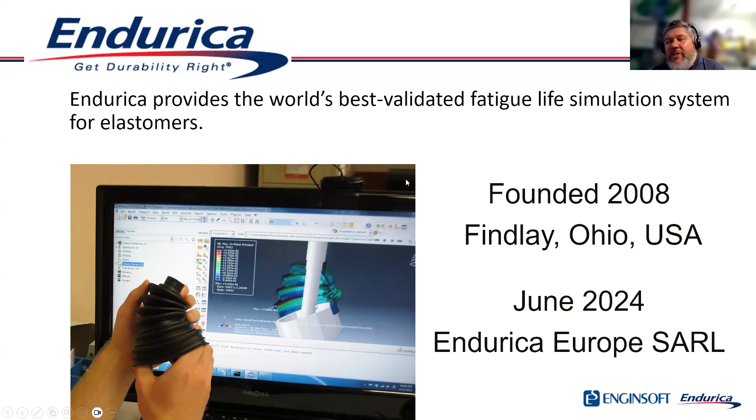So let's dive right in. Just a few words about Endurica. I'm the founder of the company. This is year number 17 for us; I started up in 2008. We did open an office in Luxembourg last year, so that's kind of new for us. Throughout the entire history of the company, we've really been focused on elastomers, simulation, and durability.

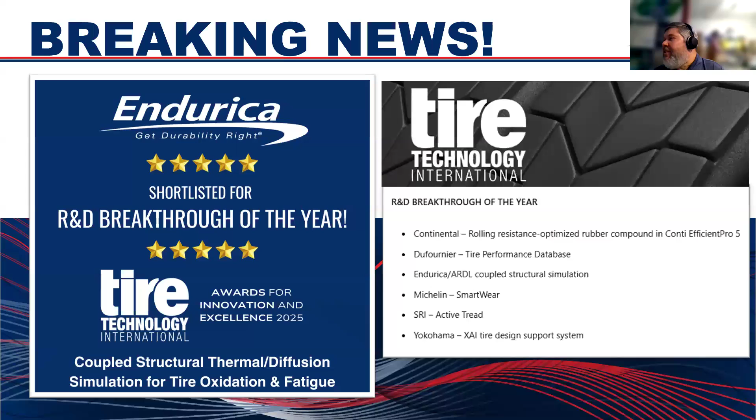I just want to brag a little bit, forgive me, but we just got word that at Tire Technology International, a conference in Germany in a couple weeks, we've been shortlisted for one of their awards. They haven't announced yet who's going to win, but we've been listed for R&D Breakthrough of the Year for a new capability we're going to be launching later this year, for modeling oxidation in elastomers with a coupled structural thermal oxidative simulation. So if you're a tire person, check that out.

To define things a little bit: in the infinite life workflow, what we're saying is that just like metals, rubbers also have a fatigue limit. If you stay below the fatigue limit, cracks will not grow in fatigue. So a simple way to design for long life is just to keep your loads below the fatigue limit. That's what we call infinite life design.

So when you do infinite life design, rather than trying to predict the life, all we do is measure the fatigue threshold, and then check to see how much margin we have between our worst case load and the fatigue limit. It's a very simple analysis, sort of a go/no-go—you either have it or you don't, infinite life.

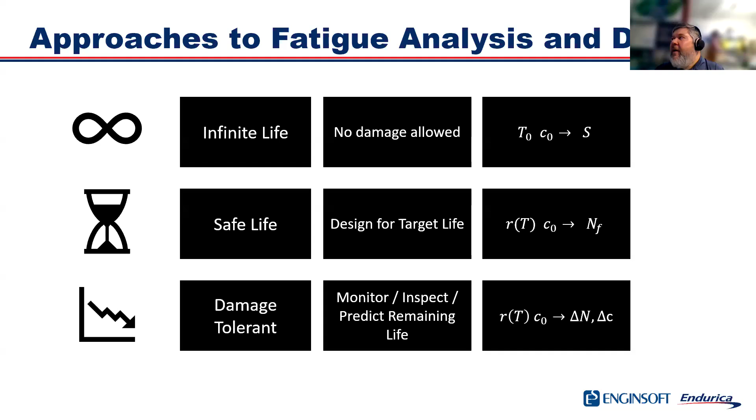So anyhow, three levels of analysis. In today's webinar, we're really just going to focus only on the first category, the infinite life design category. We'll talk about safe life and damage tolerant another day, but today we're just going to focus on the infinite life analysis.

So here's kind of an agenda for today's discussion. First of all, I want to just introduce a few principles that we can use to understand and organize how we do characterization and analysis.

So then after talking about the theory, I want to talk about how we do the materials characterization - how do you measure a fatigue threshold? And once we do that, I want to talk about how you can use these principles in materials development. People who make rubber parts a lot of times have a lot of choices about what materials and what sourcing they have for their materials. So we'll talk about how you can use these principles to select the right material for your application.

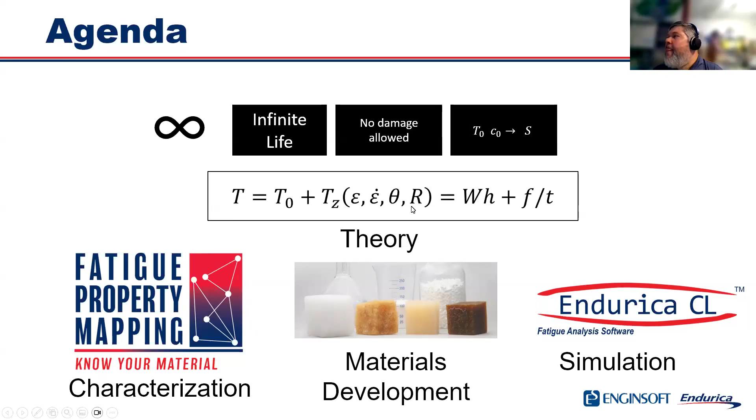And then finally, we'll talk about the simulation side - how do you use these ideas in the simulation workflow to get your design right? All right, so let's start with a few basics.

When you're talking about durability in a rubber part, there's really 3 ingredients that we need to think about. First of all, we have to think about crack precursors. If you get a microscope and look closely enough at your material, you're going to find that every rubber, even before it's ever experienced any load, always has some kind of microscopic feature that under load can grow as a crack.

This could be undispersed carbon black or contamination of some kind, microscopic, 10, 20, 50 microns in size. But that's one thing that's there. So from day one, you've got these crack starters, crack precursors in the material, and then the next thing we have to think about is crack drivers. So you've got these small features, they concentrate stress, and then under the loads that you apply to your part, those small cracks begin to grow.

And so we need to quantify the crack drivers. They're related to the stress strain behavior. We use a parameter called the tearing energy or the energy release rate - for those who may be familiar with fracture mechanics, it's kind of an idea from that field. But obviously, bigger tearing energies lead to faster crack growth, smaller tearing energies lead to slower crack growth. And so we need to quantify what's the magnitude of the crack driving force.

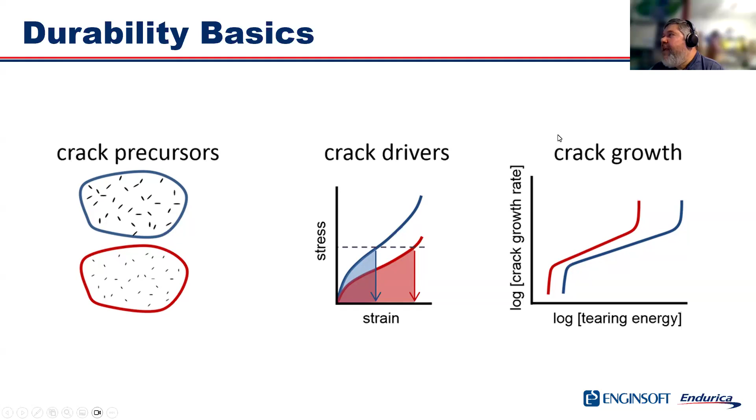At lower tearing energies, you'll get fatigue crack growth. And then if the tearing energy is sufficiently small, then that's what we're talking about when we say a fatigue threshold - what's the minimum energy that it takes to grow a crack. So these are kind of the basic ingredients for any fatigue analysis.

Here's an example of rubber's fatigue crack growth rate curve, and there's two or three features on here I want to point out. If the energy input to the crack is sufficiently large, T sub C, that's the critical tearing energy, then at that point the crack is just going to grow spontaneously.

So that would be a strength problem. As you back off on the energy, you're going to find that the crack growth rate slows down, and it's going to do that according to a power law that has a power law slope of F. You can see this if we're plotting on log scales, that's going to make a straight line relationship in the mid-range, and then if I back off sufficiently, the parameter T naught, this is my fatigue threshold.

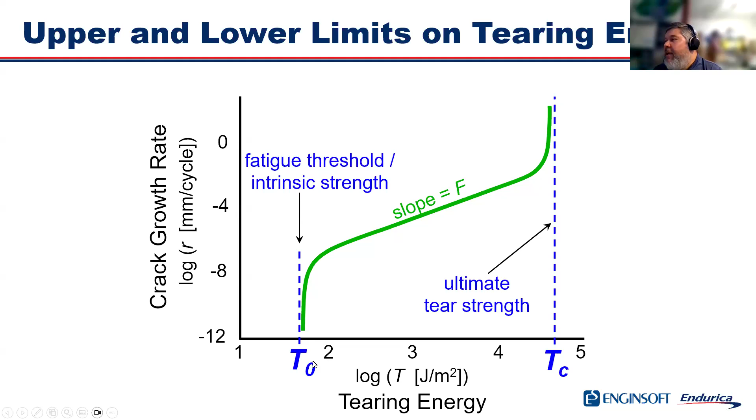Sometimes we also call this the intrinsic strength of the rubber, and you'll see why in a minute. But that's really the parameter. When we talk about doing infinite life analysis or safety factor analysis, this is the parameter that we're really interested in, is the T naught parameter.

So let's talk about the requirement. If you've got a sheet of rubber and it's got a crack, and if you imagine that crack is growing at some steady speed, you can ask the question: how much energy does it take to propagate the crack at some particular speed?

What we know is that if you want to grow a crack, then what that means is that every polymer chain—right, rubber is a polymer, long chain molecules—but in order for a crack to grow, every single polymer chain that crosses the plane of the crack must break. And in order to break each individual chain, there is a required amount of energy.

It's the bond breaking energy for these carbon-carbon bonds in the main polymer chain. So it's the energy to break a chain, and then it's also how many chains per unit cross section area. And the product of those two things gives you the tearing energy.

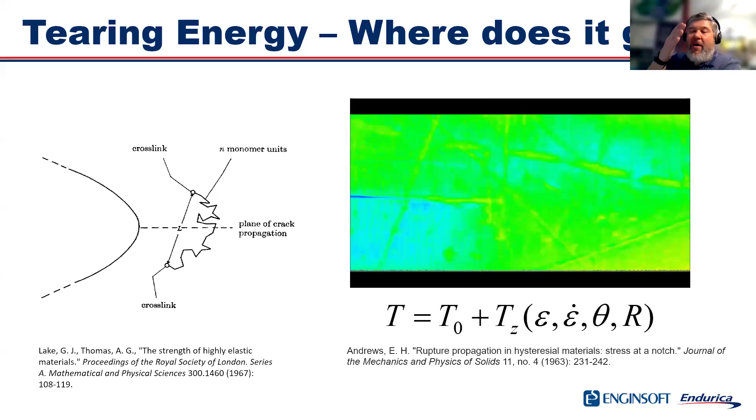T naught for a typical rubber might be of the order of maybe 50 joules per meter squared—it's actually quite a small number, not that much. Depending on how fast the crack is growing, TZ can be bigger or smaller. If you're propagating the crack at a very high rate, TZ might be as high as 100,000 joules per meter squared, and as you back off, that can be quite a bit smaller too.

So as a crack approaches a polymer chain, the polymer chain stretches out. In the measurements I'm going to show you, we're going to use an experimental method that uses cutting with a blade to measure the intrinsic strength. That's kind of what you're seeing in this image here: we have a blade penetrating into the rubber, and we load up the polymer chain and break it—that's how we measure the intrinsic strength. So T naught is the intrinsic strength, and that's what we need to measure. Of course, if you're operating at energy below T naught, there is no crack growth.

You'll hear people use different words: intrinsic strength, fatigue limit, fatigue threshold, threshold tear strength. Those all mean the same thing.

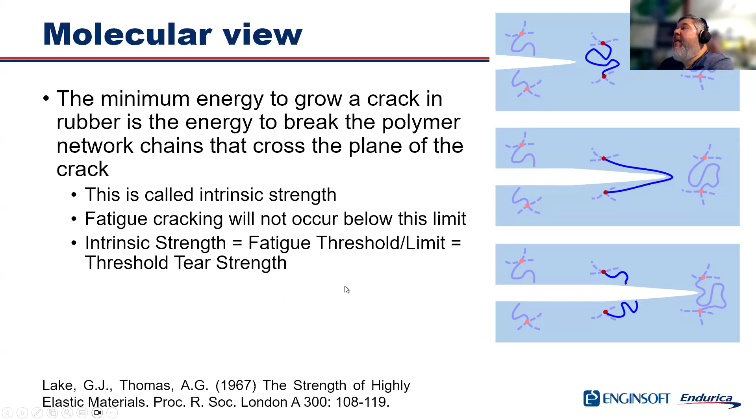Now, how do you measure this? There's a couple different methods you can use. The method we use was originally proposed by Graham Lake and O. H. Yeoh, who at the time were working at the MRPRA in the UK. They proposed a method that uses a very sharp blade.

You use a planar tension test piece. You stretch the rubber - the blue arrows are showing the rubber stretching in the horizontal direction. Once the rubber is stretched, you cut it with a blade. This blade is instrumented with a load cell attached to it, so we can measure the energy input to the tip. The blade is meant to be as sharp as you can get it. Here's a microscope image of the blade.

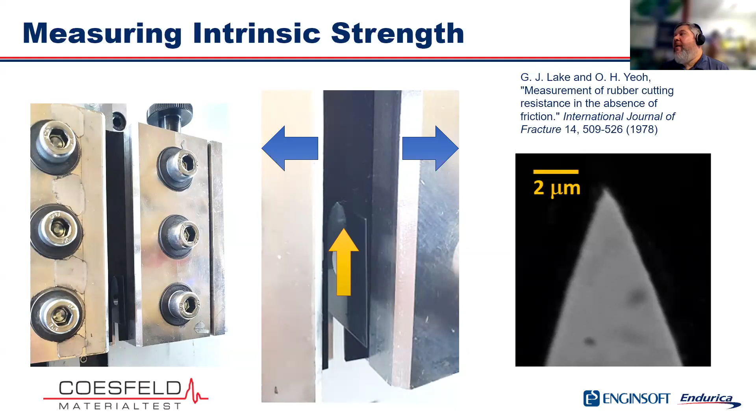This is how the measurement works. To talk more about it - I showed before how the tearing energy, when the crack is growing at a certain rate, is the sum of two parts. You've got the intrinsic strength that I want to know, and then you've got this TZ part that represents all of the dissipative processes. If the crack is growing quickly, that's going to be a very large number that'll completely bury T naught.

So in the experiment, what we want to do is find a way to get rid of TZ. The reason cutting with a blade works is that the order of the crack tip singularity when you have a blade is higher than if you don't, which means the crack tip process zone is greatly reduced when you have a blade. What you're looking at here is a finite element simulation showing the size of the process zone as a function of the amount of stretch on the rubber.

So in the experiment, we're going to stretch the rubber a little bit, cut it, stretch it a little more, cut it, stretch it, cut it. We're going to look for the place where the input energy is minimized. By doing that, we can make TZ as small as possible so that what's left is the T naught observation.

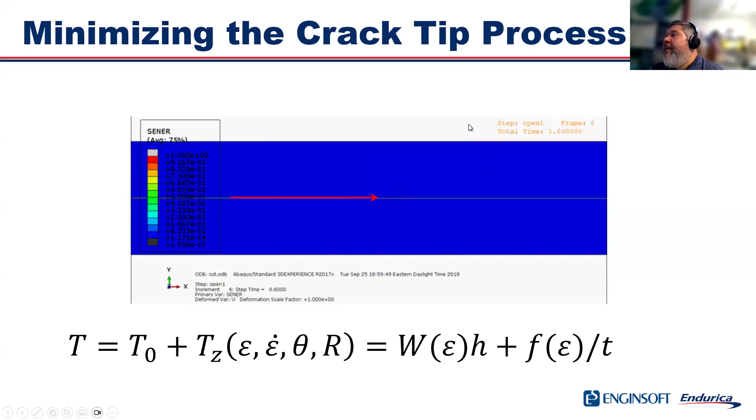And then when I put the blade on, if I know the force on the blade, that's little f, that contributes an additional energy - that's the second term. So the first term is the opening component of the energy, and the second term is the cutting component of the energy.

Now, the measurements I'm going to show you are made using a device called an intrinsic strength analyzer. This is a machine sold by a company in Germany, Coesfeld. We actually worked closely with Coesfeld to bring this instrument to market, so that people would have a way to measure this. It gives you results in about an hour or two that gives you T naught.

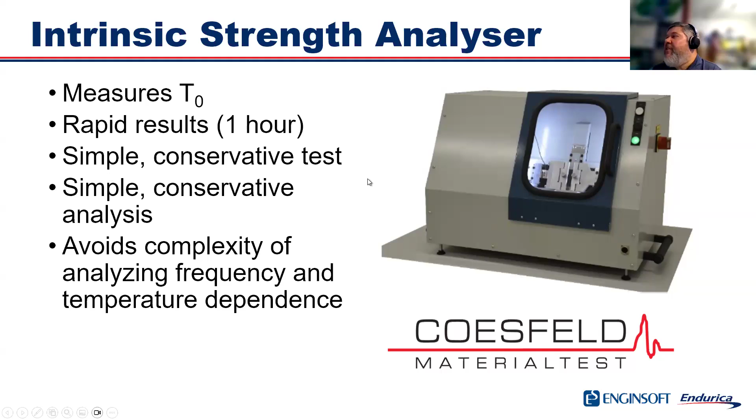It's a simple, conservative test. And like I said, it avoids the issue with the other method, where you'd have to do a fatigue test and reduce the crack growth rate sufficiently that you're approaching the threshold. The problem is that takes a long time. So this is a very fast and efficient test. Here's what it looks like to run the test.

In this case, there's 4 strain levels - you can customize that, but here we've got 4. Let's say maybe 3%, 5%, 7%, 9% strain. First we do a few cycles to precondition the specimen. After preconditioning, we go to the first strain and hold, then the second strain and hold, then the third, then the fourth. The hold period, if you look at this, is something like about 10 minutes per step.

Now, once we're holding at fixed strain, this third chart is showing the cutting force on the blade that's cutting the strip of rubber. What I want you to notice is that for each hold period, there's kind of two sub-steps. The first thing that happens once I hit my hold strain is that the machine stops and lets everything sit still for a couple of minutes, so any viscoelastic effects can die away. We call that the equilibration period. Everywhere you see a red rectangle, the machine is just sitting still, equilibrating. Once everything's in equilibrium, we begin to move the blade to cut the rubber.

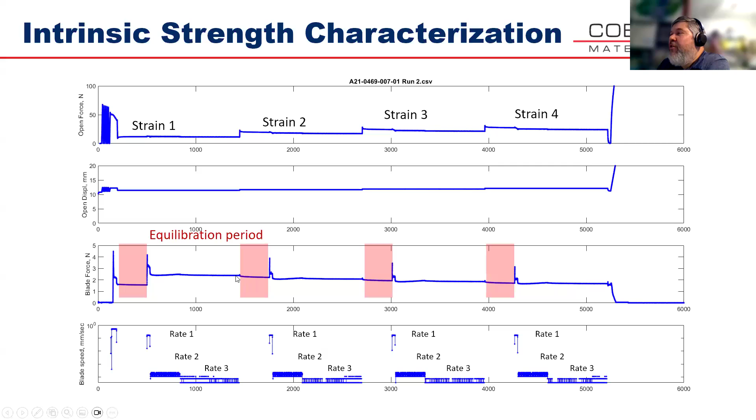So here's some examples of the curves that come out of this measurement. What we do is from each of these, we take the final steady state cutting force value at each strain level and at each rate, and we plot them in these charts. So what you're looking at here is a plot of the first term in the tearing energy equation versus the second term - this is the opening energy on the x-axis, and the cutting energy on the y-axis. You can see there's 3 curves here.

The top curve is for the fast cutting rate, this was at 10 millimeters per minute. The next 2 curves are for the slower cutting rates - factor of 100, factor of 1000 smaller. What's really beautiful here is that these 2 curves are almost on top of each other, which indicates to us that this is a good measurement, close to giving us the threshold.

So we plot these curves and fit a line that has slope -1. Notice how this red line crosses the x-axis at 1033 joules per meter squared, and crosses the y-axis at 1000 joules per meter squared. These curves are just kissing the red line. So the red line is what we would identify as the threshold cutting strength.

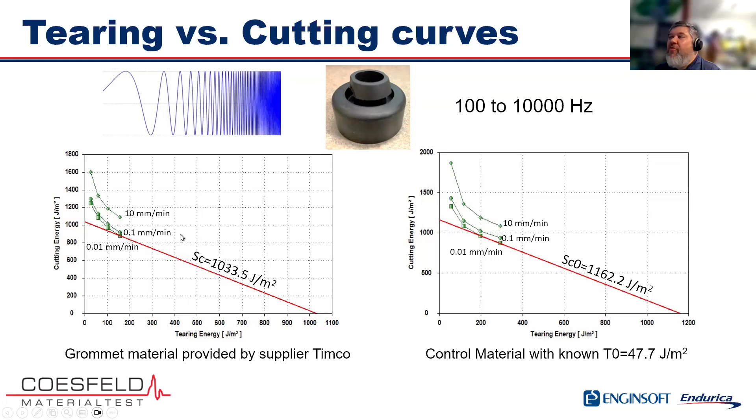And we measure the cutting energy as 1162. For the grommet material, we measure a cutting energy of 1033. And so the fatigue threshold that we would measure or report then would be basically 47.7 times the ratio of 1033 divided by 1162. That's going to give us the fatigue threshold for the grommet material.

And you can see here, this is a plot comparing the cutting energy that we measure with the blade to the inferred fatigue threshold. You'll notice they are different numbers. The reason for that is that the blade is not infinitely sharp, right? There's a finite radius of curvature at the blade tip, and so the difference between these reflects the sharpness of the blade. And so when we run this experiment, we run the control material so we can calibrate for the sharpness of the blade.

This was an experimental validation that Lake and Yeoh published for 6 different rubber compounds. And this was the paper where they showed that if you measure this cutting energy, it's very nicely correlated to the fatigue threshold that you would measure using very, very long crack growth tests.

For our study, we end up with a fatigue threshold of about 42 joule per meter squared for the grommet compound. And this is my plot of what we measure for cutting energy versus what the fatigue threshold is.

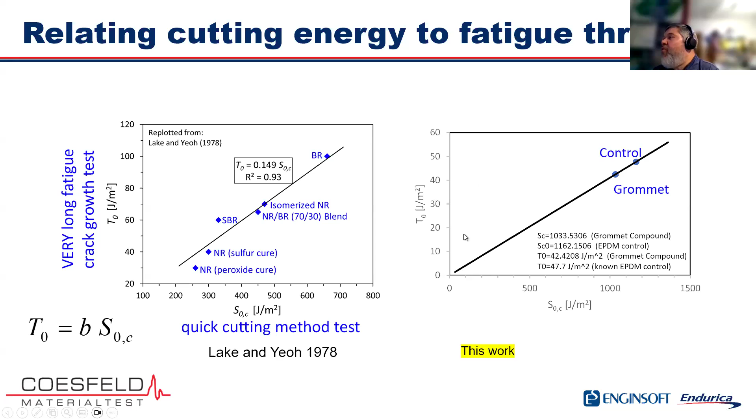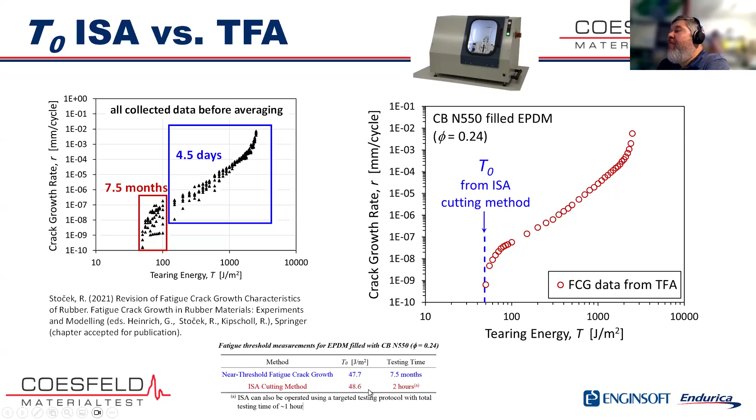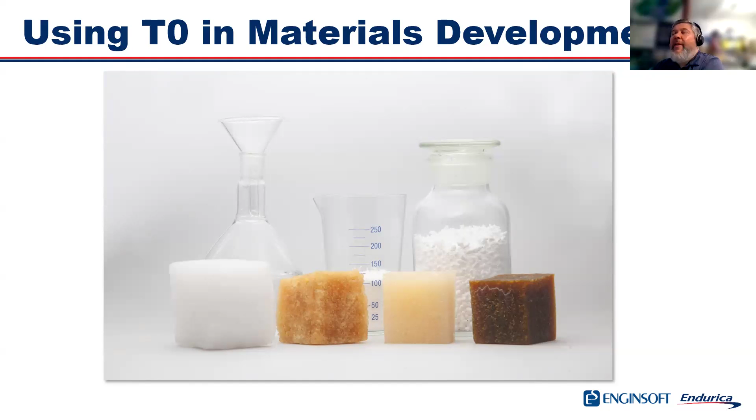All right, so that's kind of a little bit about the theory and the test method. Let's talk about how we can use this information in materials development applications. So a lot of times in materials development, the question that you're faced with is which material is the one that's right for my application. And so it's kind of A versus B, and how do you rank things and so forth.

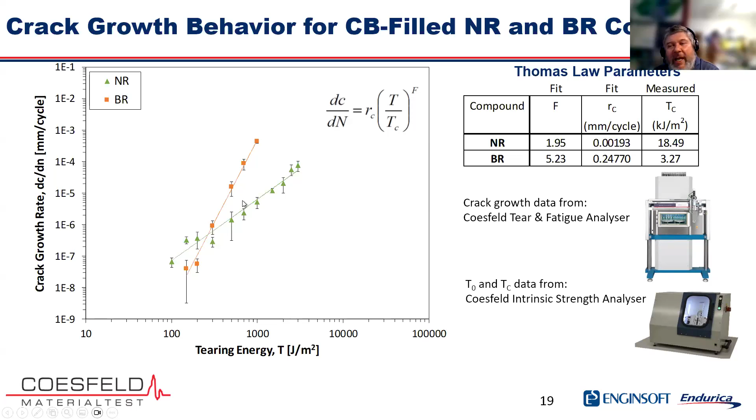One thing I want to point out is that T naught and TC, you can think of them as upper and lower bounds on these fatigue crack growth rate curves. As you change materials, the value of TC might change, and the intermediate behavior is going to change similarly. We can use that principle to make rapid estimates of the crack growth rate behavior.

So what I'm doing here is overlaying in this slide the results of the 20-hour crack growth test. The triangle data points here and the square data points here, that's the 20-hour crack growth test, and you can see you get a certain power law slope.

What I'm going to do is take the measured T naught and TC values for these two materials. For T naught, I'm going to plot those at a crack growth rate of 10 to the minus 8 millimeters per cycle. You can see here T naught for the natural rubber is about 50 joules per meter squared, and for the BR it's about 100 joules per meter squared. Then if I plot the TC value at a crack growth rate of 0.01 millimeter per cycle, you get this reversal in ranking.

And if you just draw a line connecting these two points, you can see that it actually reasonably approximates the crack growth rate curve for these two materials. It's not exactly precise - the slope you get with this simpler method isn't exactly the same as what you get with the actual crack growth test, but it's in the ballpark. When you're sorting material selection options and you've got a lot of them, this can be a very efficient way to rank order your materials.

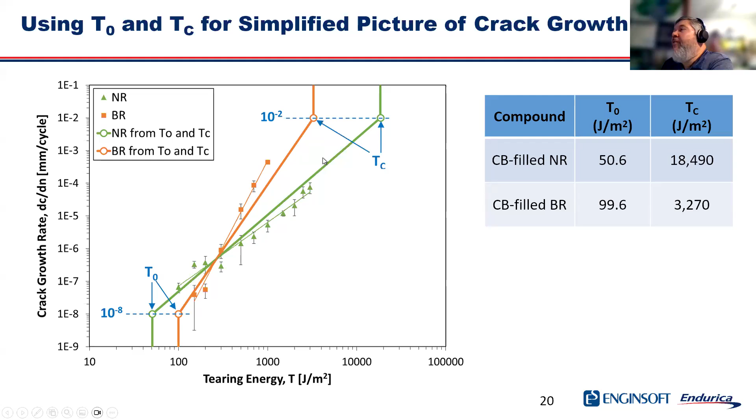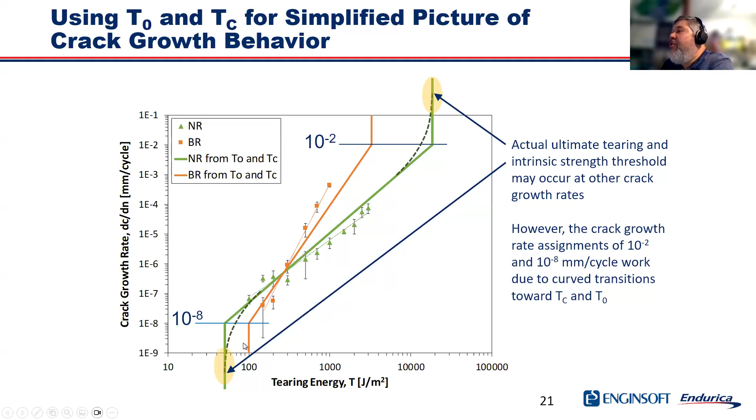So the key to this rule of thumb is just to remember that 10 to the minus 8, 10 to the minus 2, those are just kind of a rule of thumb guess here. In actuality, they might be different numbers, but for purposes of estimating in a materials selection context, you can use this. In fact, I call this the Robertson rule, for anybody who may know Chris Robertson - he originally noticed this trend in our data sets.

And here's an example of the calculation. If you give me TC and T naught, I can use this equation: F equals log of RC over R naught, which in this case is 10 to the minus 2 divided by 10 to the minus 8, divided by log of TC over T naught. That gives you an estimate of your power law slope.

You can see here for the NR, the actual experiment gives us 1.95, and our approximate method gives us 2.3. For the BR, we see 5.2, and for the approximate method we see about 3.9, or so about 4.0.

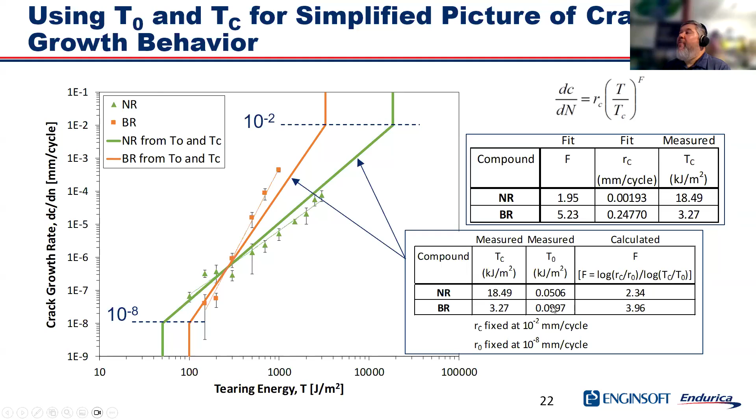We've actually tested this out on a large data set. We've gone back to a database of materials that we've measured, both T naught and the crack growth curve, and compared the actual slope values with the F values that we calculate using this simple method. It's not perfect, you can see there's a bit of scatter, but the correlation is something like R squared equals 0.8, which for purposes of doing materials development is probably good enough.

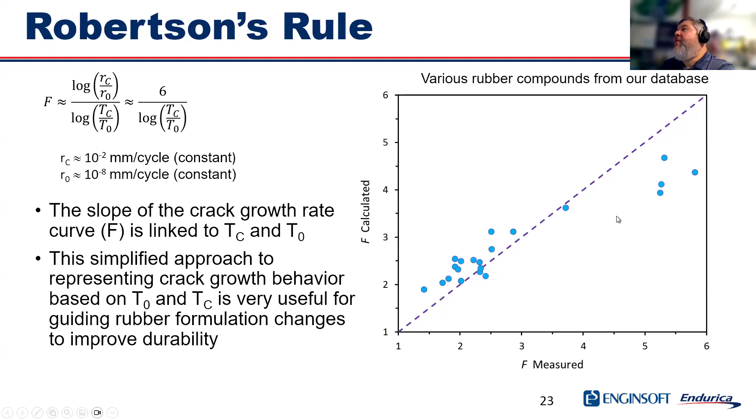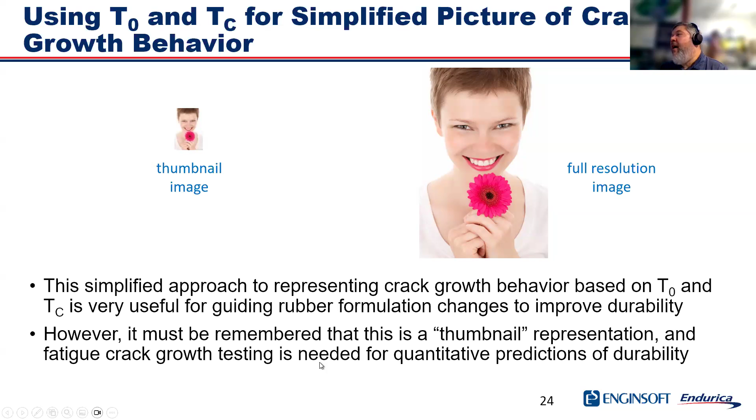Just to drive home the point, if you're going to use just T naught and TC without doing a crack growth test, it's a bit like using a thumbnail image. This is a very low resolution image. You wouldn't scale this up and present it to people as a pretty picture, but for getting an idea of what things look like, it's a very useful tool.

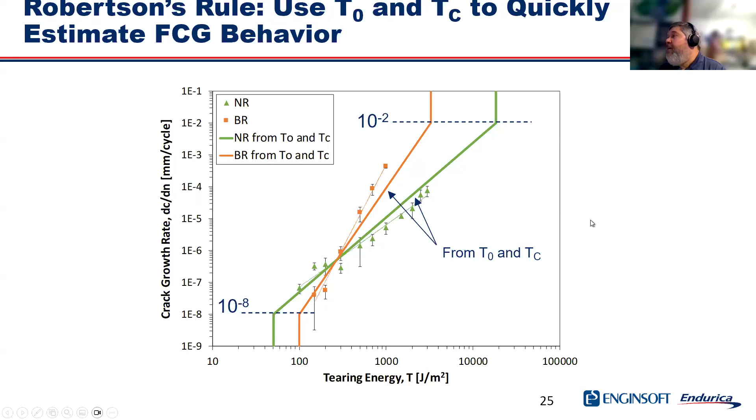So anyhow, that's Robertson's rule: if you measure T naught and TC, you can sort of fake in these crack growth curves, and you can do this to do a very rapid, low time, low cost sorting of your material options.

Okay, so last topic, let's talk about using the fatigue threshold T naught in a simulation. This is the workflow where we're going to calculate a safety factor. The safety factor is the ratio between your fatigue limit and your worst case load. Typically this might look like this: obviously you're going to measure your rubber stress strain response, you're going to do some kind of nonlinear analysis of your duty cycle.

You're going to have experimental measurements of your precursor size, and experimental measurement of your T naught value, using maybe the ISA, and those are all going to go into your analysis. The safety factor is an output that you can request from the Endurica CL fatigue solver. So you just put in your strain history, put in your material properties, and one thing you can get out is safety factor.

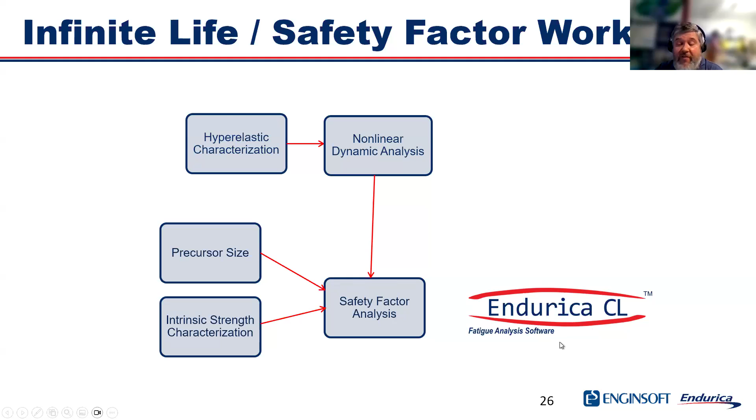When you use the safety factor analysis in Endurica, in cases where you have multi-axial loading, it's going to use a procedure called critical plane analysis. The purpose of critical plane analysis is to take account of the multi-axiality of loading.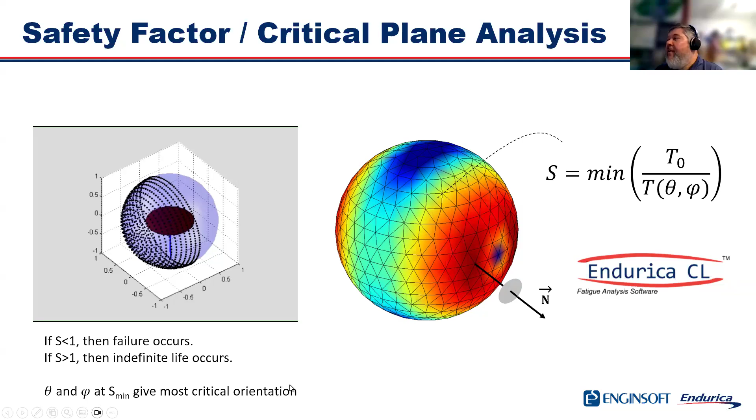What you're going to get then is, if you follow the unit vector to the surface of the sphere and then color each point, you'll get a colored ball where you see red, that's the place where the safety factor is the smallest. Where you see blue, that's where the safety factor is the biggest. What we report for each finite element is the value of the reddest point, or the smallest safety factor. So this not only gives you the safety factor, it also gives you the orientation of the plane for each element that is closest to being not infinite life.

So let's apply this to our grommet. Here are some material properties for the particular rubber that we've got. You can see I've got a shear stiffness of 3 megapascals, a precursor size of 100 microns, and a threshold of about 800 joules per meter squared. And I've got 3 load cases: a high, a medium, and a low load case that I want to model. Maybe I'm developing some specs for what the allowable loads are for this grommet.

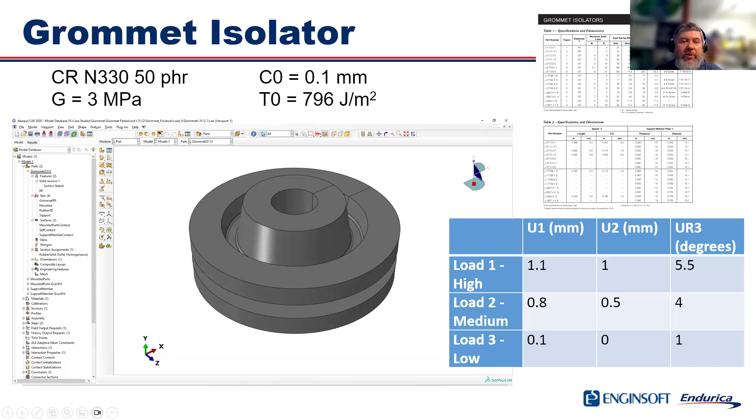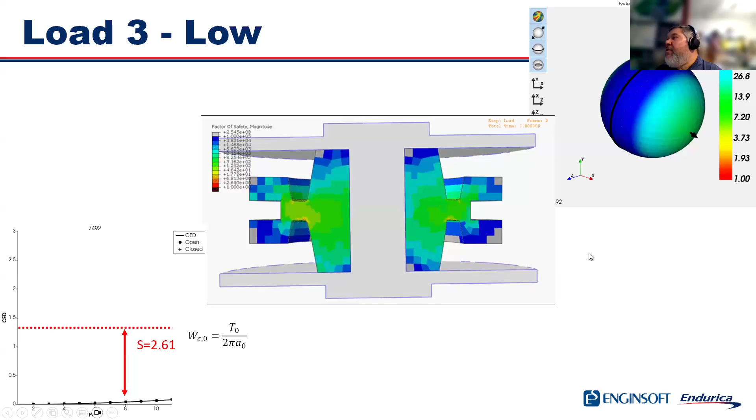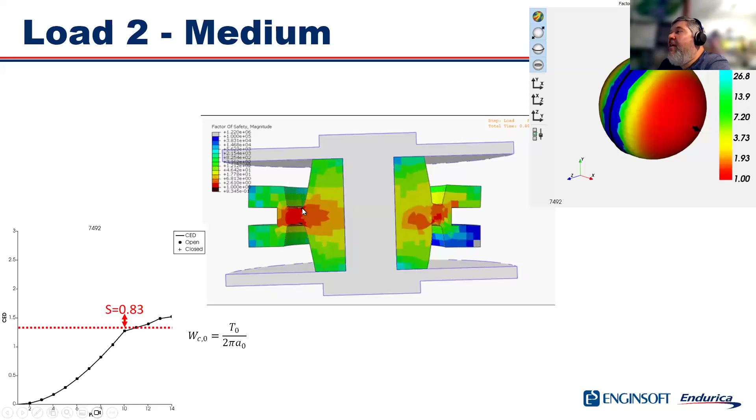Now, if I repeat the analysis for the medium load case, you'll notice just this tiny little black spot on the tension side of the grommet load case. And if you look at the value of safety factor there, I'm reading S equals 0.8. So this is an indication that I would not expect infinite life here. The life may still be acceptable, but this is a case where maybe you would do a deeper analysis and look at the safe life approach to calculate how many cycles it lasts. But it's not going to live forever. There is a potential here for a crack.

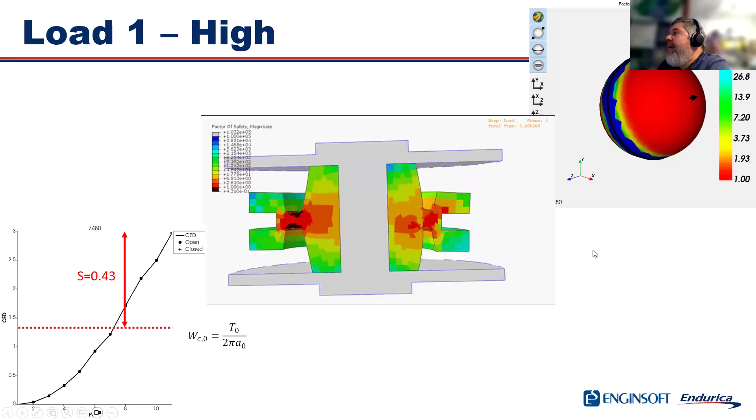And then obviously for the high load case, you can see it's an even worse situation. Again, you'd probably want to do the safe life analysis. So in this case, the grommet qualifies for the low load, but it doesn't qualify for the medium or the high. So, very simple analysis, this is a good example. Here's another example of where you might use the safe life analysis.

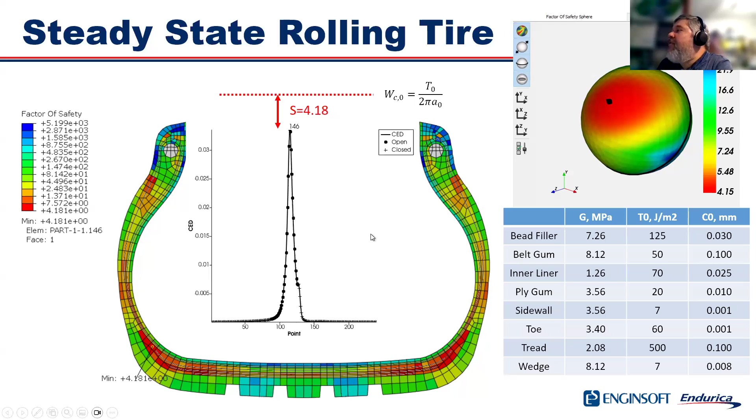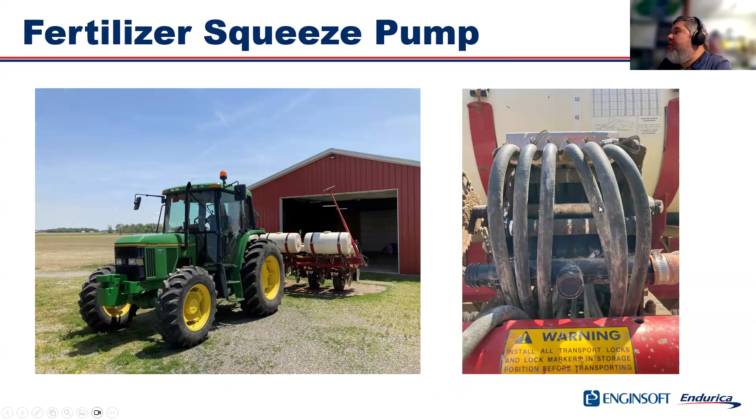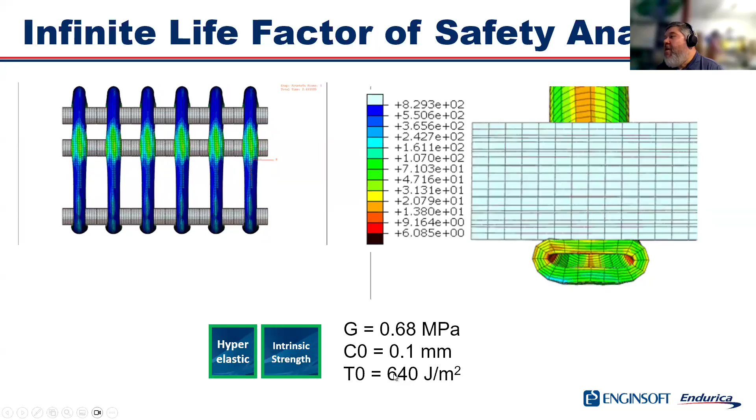When I use the infinite life method, I don't need to worry about rate or temperature dependencies. All of that we would worry about in a safe life analysis, but for these infinite life analyses, we just need to make sure we're below T naught, which itself does not depend on temperature or rate.

All right, so I'll just summarize here and say that if you want to characterize this, you want to use the intrinsic strength test. It's a great screening test. If you're looking at long-term durability, it gives you the threshold T naught that, if you run it with the control material, you can plug into your simulations and get safety factor. And if you want, you can use Robertson's rule to quickly estimate a crack growth curve.

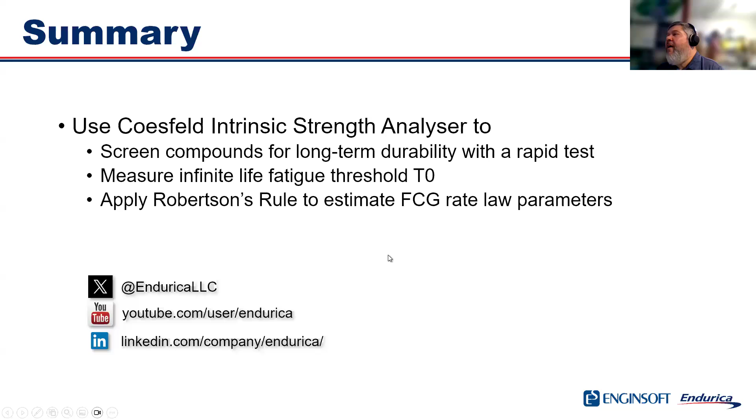The analysis that we've shown you is great for understanding basic failure mechanics without getting lost in all of rubber's special material behavior, and it can give you a safety factor, which is good for doing A versus B comparisons, maybe in design.

It's using the full power of critical plane. So if you have multi-axial loading, it's a very accurate and conservative way to look at that, because you're looking at all the different ways that a crack could grow.

The only limitation is that it doesn't consider aging. So we say infinite life, but in fact, if the rubber ages, the material properties can change. The value of T naught itself can change, like if you have a heat exposure, T naught can change.

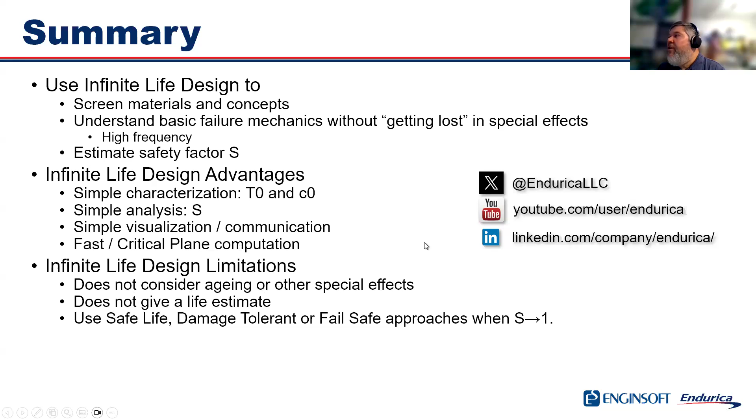If you want that, then you're going to have to do the safe life or damage tolerant approach. So that really covers the topic, and I'd be happy to entertain questions or comments.